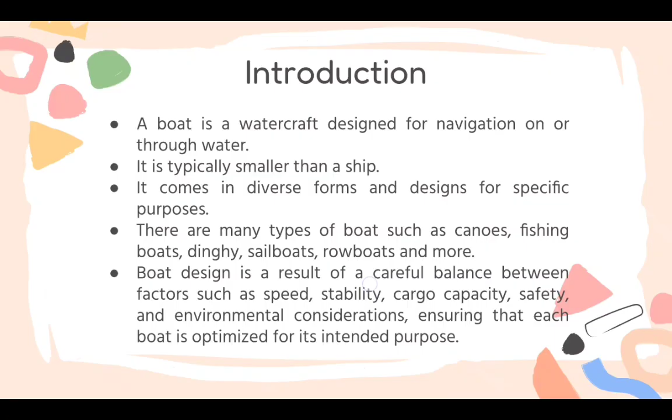CN230121. Our group discussed the centroid and center of gravity of the boat. A boat is a watercraft designed for navigation, whether it's on water or through the water. The size is typically smaller than the size of a ship, and it comes in various forms and designs for its specific purposes. And there are many types of boats such as canoes, fishing boats, dinghies, sailboats, rowboats, and many

more. So boats have different designs for various purposes because of the specific requirements of each activity, for example fishing activities, racing activities, and many more. So boats designed for speed, such as speedboats and racing boats, have designs that prioritize the shape of the boat and lightweight materials to maximize speed and also stability. For example, fishing boats' designs are focused on balance and steadiness to ensure that the platform is stable for fishing activities.

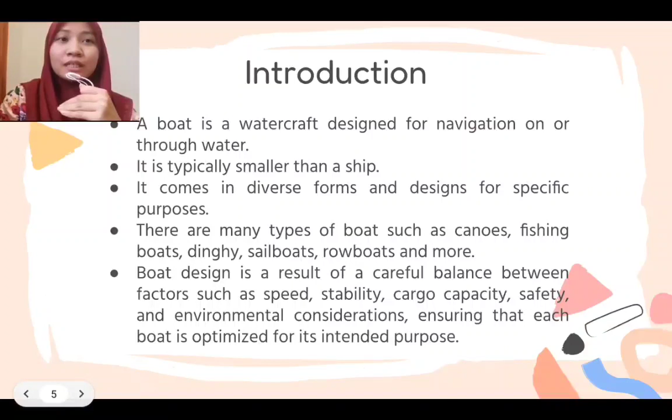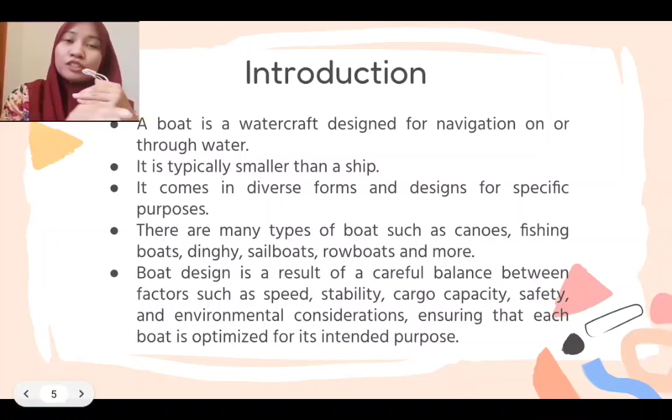Other than that is cargo capacity. For example, container ships need a large space to carry a large amount of goods. So their designs prioritize cargo capacity and stability, and not only that, but also fuel efficiency. Our objective of this project is first to identify the centroid of each part of the boat. Second is to find the center of gravity of the boat. And the third one is to determine the principles and concepts for boat stabilization in daily life.

So now I would like to present the centroid and center of gravity theories. First and foremost, let us know what the centroid and center of gravity are. Centroid and center of gravity is the point located at the center of gravity or weight of the body, also known as center of mass. There are three types of centroid, which are centroid of lines, centroid of areas, and centroid of volumes.

The centroid of lines only involves one-dimensional objects such as ropes and wires, and this type of centroid is measured in length. Centroid of areas is for two-dimensional objects measured in length and width, where area is considered. Next, centroid of volumes is for three-dimensional objects with coordinates x, y, and z to measure the volume.

So what can affect boat stability when there is a wave? Stability of vessels can be determined by metacentric height, GM, which can track the stability of ships for a range of heel angles. When there is a wave from the sides, it can cause the metacentric height of the ship to become negative, and the ship is then not in a stable condition and can capsize facing the heeling moments.

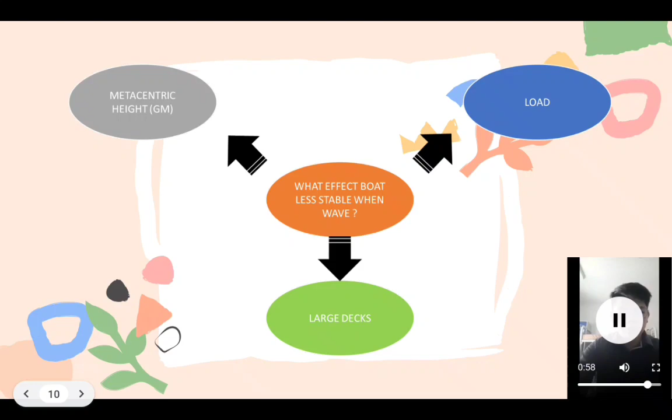Next, a vessel with full loads will also be less stable, because adding weight above the boat's center of gravity will decrease boat stability and raise the center of gravity. As the center of gravity rises, less heel is required to capsize the vessel. Vessels with large decks may tend to ship water, which can make them less stable.

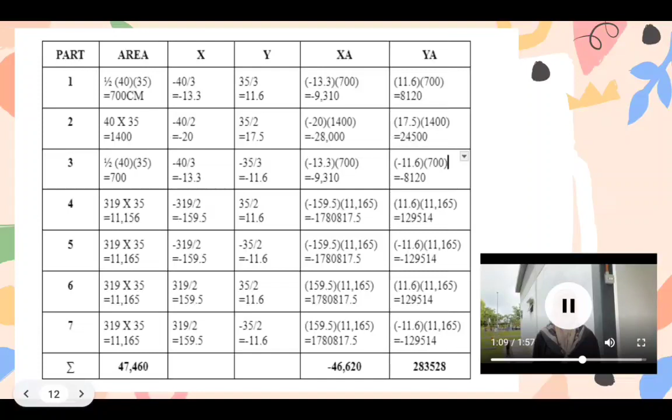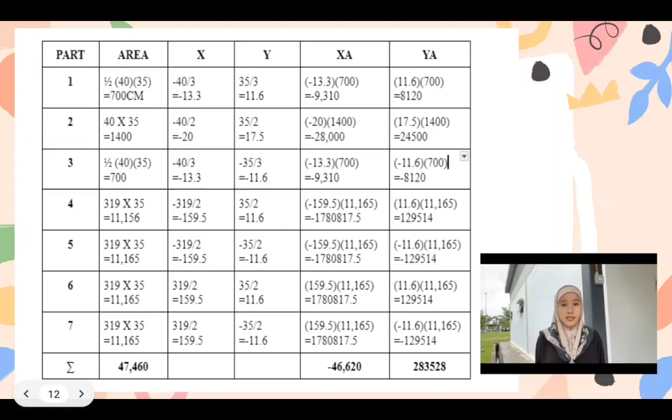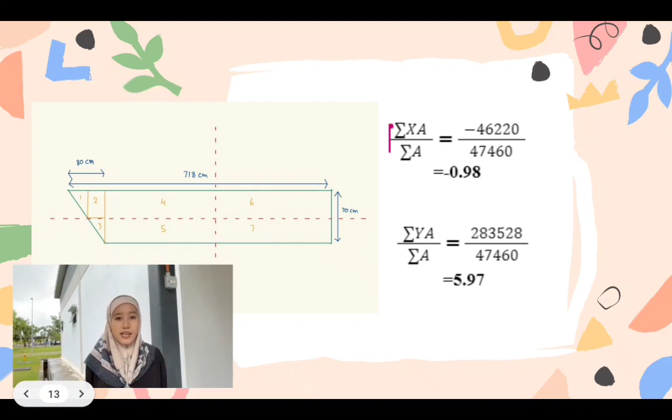Then, we need to calculate the total x and y axis. The x and y values need to be multiplied by the area. After obtaining the values, we need to total them. For the x-axis, I got minus 46620, and for the y-axis, it was 283528. After finishing the calculation, we need to get the centroid. We need to divide the total value of x or y by the total area. The x-axis value is minus 0.98 and the y-axis is 5.97.